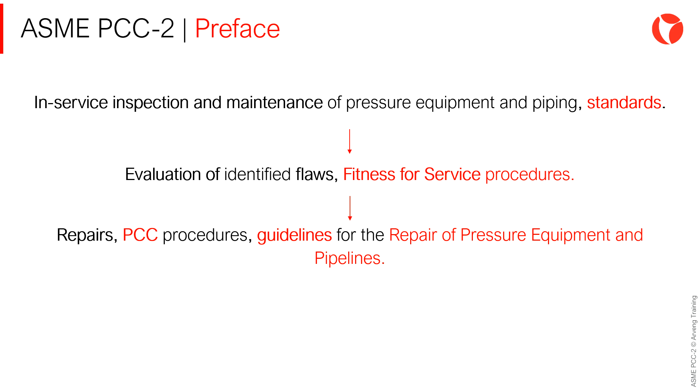The Inspection Planning Standard provides guidance on preparing a risk-based inspection plan. Flaws that are identified are then evaluated, where appropriate, using the fitness for service procedures provided. Finally, if it's determined that repairs are required, the procedures provided by the PCCs provide guidance on the repair of pressure equipment and piping. It's important to keep in mind that none of the PCC guides are codes, although this...

...sounds a bit contradictory since their own name, PCC, indicates Post-Construction Code. They are not codes, as is the ASME 8 Division 1 Design Code, for example. So we're not talking about mandatory codes, but rather codes that provide recognized and generally accepted good practices that can be used in conjunction with codes such as API 510, API 570, and NB 23, as well as jurisdictional requirements.

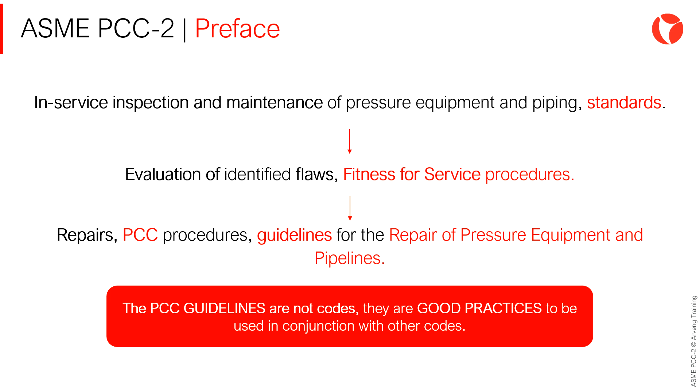This is not a surprise since it would be impossible to gather every possible case and type of repair that can be found. Each repair is unique, and although some seem very repetitive, they all have their nuances. It would be almost impossible to collect every single case, which is why this is a compendium of recognized rules and practices based on some of the most common cases.

PCC-2 is divided into 5 parts. Part 1 covers the scope, organization, and intent of the code. It's applicable to all articles.

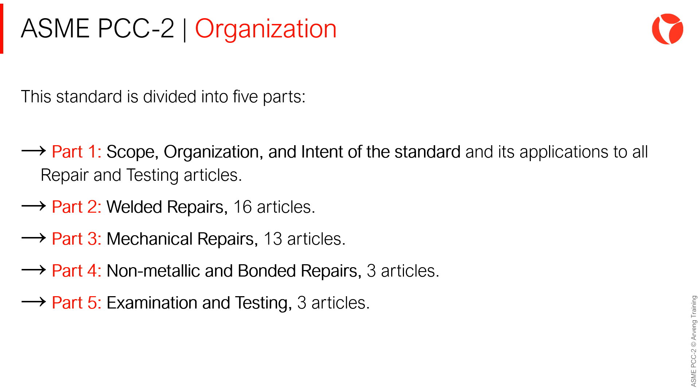Part 2 covers welded repairs and is made up of 16 articles. Then we have Part 3, mechanical repairs, which includes 13 articles. Part 4, non-metallic and bonded repairs, 3 articles. And finally, Part 5, that talks about examination and testing to be carried out in each of the repair methods, which includes 3 articles. It's worth clarifying that each of these articles is a specific repair method within the part.

To see each article in detail would take months, which is why in this course we'll focus on the most relevant topics in the code.

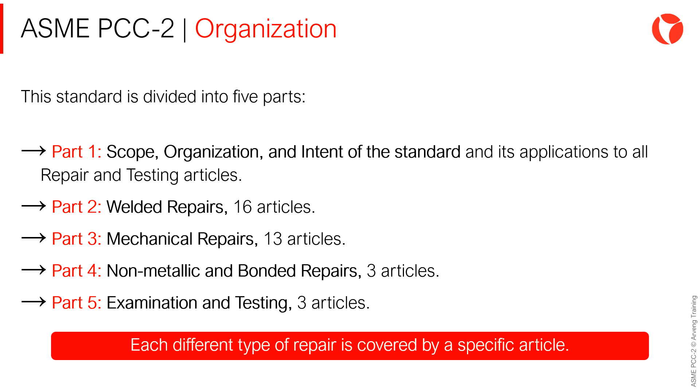Based on that, we can say that the general structure of PCC-2 is as follows: welded repairs, mechanical repairs, non-metallic repairs, and examination and testing. These are the 4 main areas that we'll cover throughout the course in order to study different repair methods and apply them to pressure vessels and piping systems in a practical way.

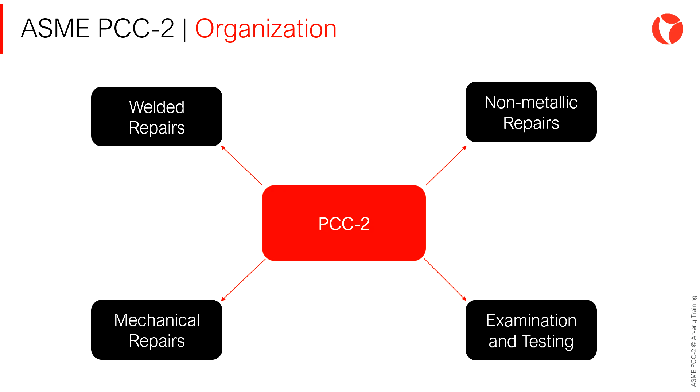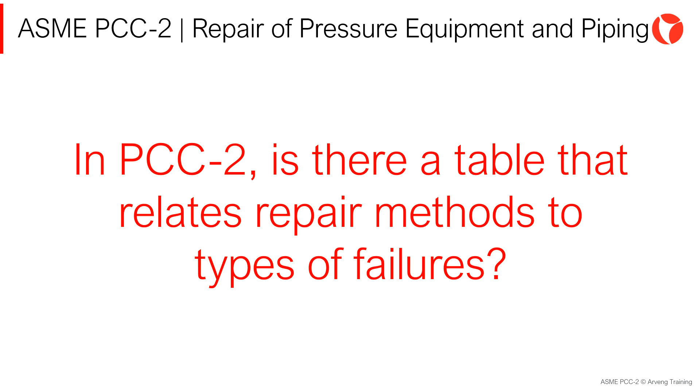A question we probably all ask ourselves is: is there a table that directly relates a repair method to a type of failure? As we mentioned previously, this would be very difficult since each repair is unique. Since there are so many diverse repairs, it's hard to conceive a table where a type of repair is recommended based off of the flaw detected.

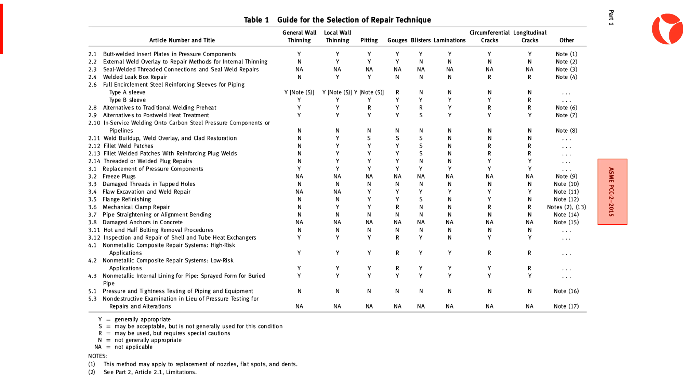In reality, this table did exist. It was Table 1 of the 2015 edition of ASME PCC-2. This table listed all the articles and different repair methods and related them directly to different types of failures.

For example, if we have general wall thinning, local wall thinning, or pitting, Article 2.1, which covers butt-welded insert plates, would be applicable. So basically, what this table does is indicate the applicability of different repair methods depending on the different failures and flaws found.

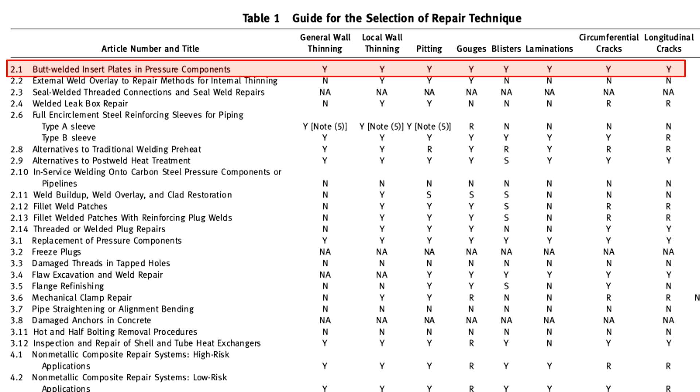As we see, here we can find all the repair methods. We have Part 1, Part 2, Part 3, and finally Part 4.

Before, we said this table existed, because currently this table does not actually exist, as it was removed from the code. This has to do with what we previously mentioned: each repair has so many variables that it ends up being unique. Therefore, simplifying everything in a table is impossible, which is why the committee decided to eliminate it, starting with the

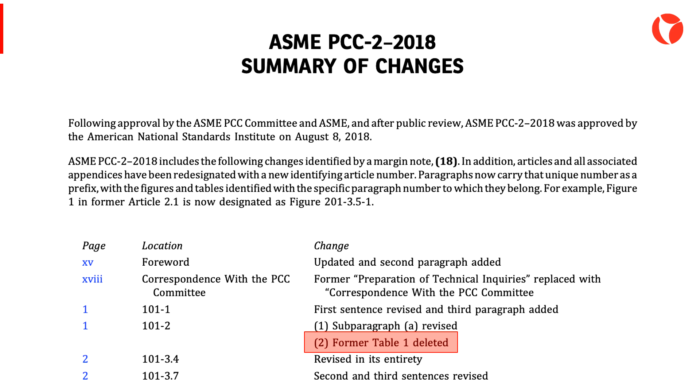2018 edition of the code. In the end, this is actually only a guide, so each repairer will be the one to decide which of the methods to apply. However, we can use the table as a reference to get an initial idea of the

type of repair that could be applied. Another question that many of us ask ourselves is, what does it mean for equipment to have an ASME seal or stamp? This question may seem a bit obvious, but really there are certain industrial processes where this type of

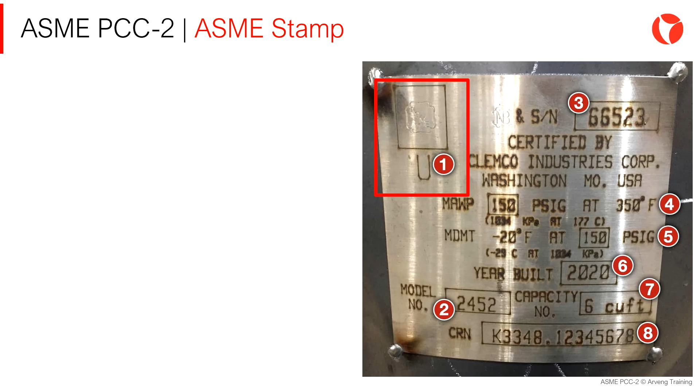seal is not needed. The ASME stamp is a mark applied to the nameplate of equipment manufactured by an authorized workshop or other organization. This stamp indicates that the equipment or component has been manufactured in accordance with the applicable section of the ASME BPVC. This is basically a quality certification, since the equipment has not only had to follow a series of protocols and inspections during the design process, material selection, manufacturing, welding, and testing by an authorized manufacturer, but it must also

have been supervised by a third party. It should be noted that the ASME stamp applies to pressure vessels, but it's not applicable to piping systems.

In the United States or Canada, for example, it's mandatory for pressure vessels to have an ASME stamp. In Europe, the ASME stamp is not mandatory, but all newly installed equipment must have CE marking. Although it's not mandatory in Europe, the ASME stamp is very good practice and is an additional quality seal, which is why many industrial plants adopt it as a guarantee of the safety of the equipment.

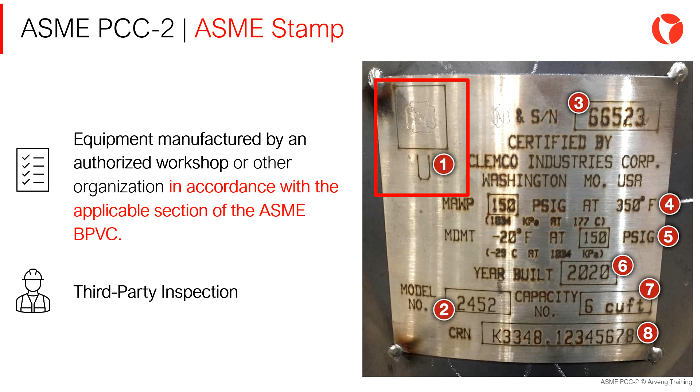Simply put, by having the ASME stamp, we ensure that the equipment has, at the very least, passed a series of inspections and is safe.

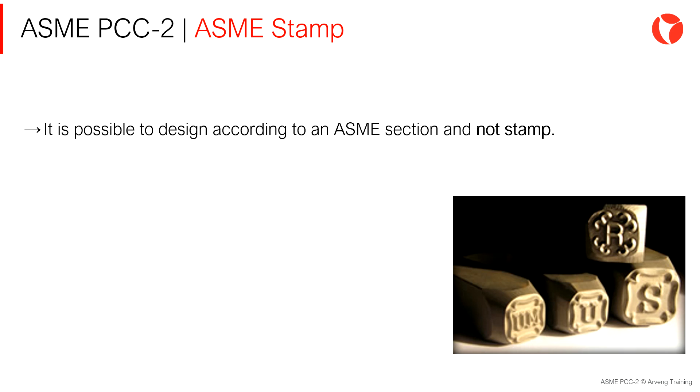These are some considerations to take into account based on what we've said. Just because a piece of equipment does not have the ASME stamp doesn't mean that it has not been designed in accordance with the code. A lot of equipment is manufactured according to the code, although later, for various reasons, it's not stamped.

The stamp is a requirement primarily associated with safety issues. Since equipment that has the ASME stamp is understood to meet all safety requirements, the cost of associated insurance will be lower. It should be taken into account that, although the stamp entails certain advantages, it's an exhaustive and expensive process. Not any workshop can place an ASME stamp. They must be approved in order to do so.

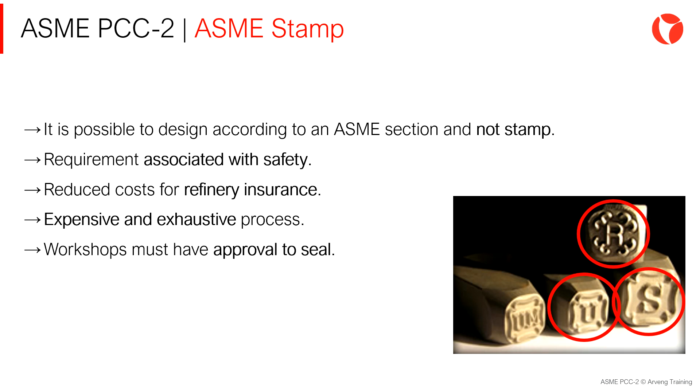In the image, we can see different stamps: the U stamp for Section 8 Division 1, the S stamp for steam boilers, and the R stamp for repair. As we can see, there are different stamps for different components. For example, the U stamp for Section 8 Division 1, like we saw, U2 for Section 8 Division 2, and U3 for Division 3.

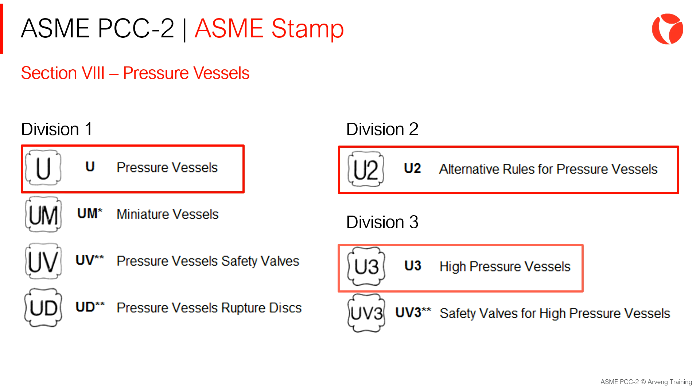The next question we ask ourselves is, if the equipment has an ASME stamp, how do we maintain the stamp and continue to comply with the code requirements when making a repair?

If the equipment has an ASME stamp and a failure occurs and needs to be repaired, it must be decided whether or not to maintain the quality certificate. If it's decided to continue maintaining the quality seal of the equipment, for example, for Division 1 or Division 2 vessels, the repair must be made in accordance with the National Board. This is the same as saying NB23.

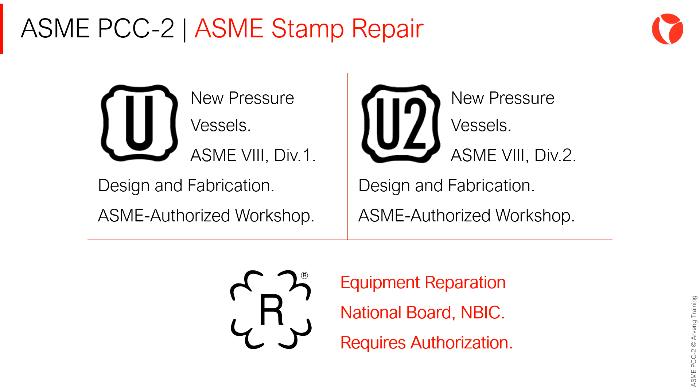It's important to clarify that this only applies to vessels under pressure and in cases where the intention is to maintain the ASME stamp, since at the time of repair it can be decided to not maintain it.